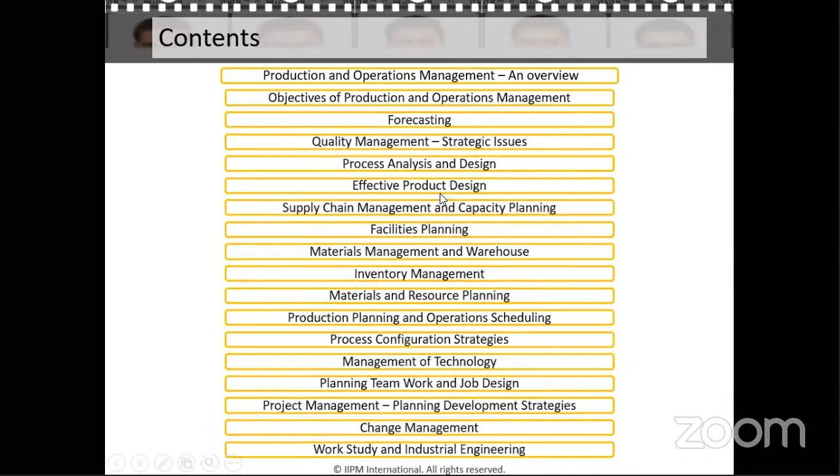Okay, so quickly, let's look at the overview of production and operations management. The very essence of any business is to cater to the needs of customers by providing services and goods, and in the process, create value for customers and solve their problems. Production and operations management talks about applying business organization and management concepts in the creation of goods and services. So in essence, production and operations management is responsible for the transformation of raw materials into value, which comes out in the form of goods or services that customers buy.

Production is a scientific process which involves transformation of raw materials or inputs into desired products or services by adding economic value. Production can broadly be classified into: one, production through separation; two, production through modification; and three, production by assembly. Let's look at what each one is trying to say.

Please note, our assignment as safety officers in this regard is to find out the possible sources of hazards, possible sources of risks to the production and operations department of any organization, and also to find the best safety approaches and best safety strategies we can use in managing operations and production in our organizations.

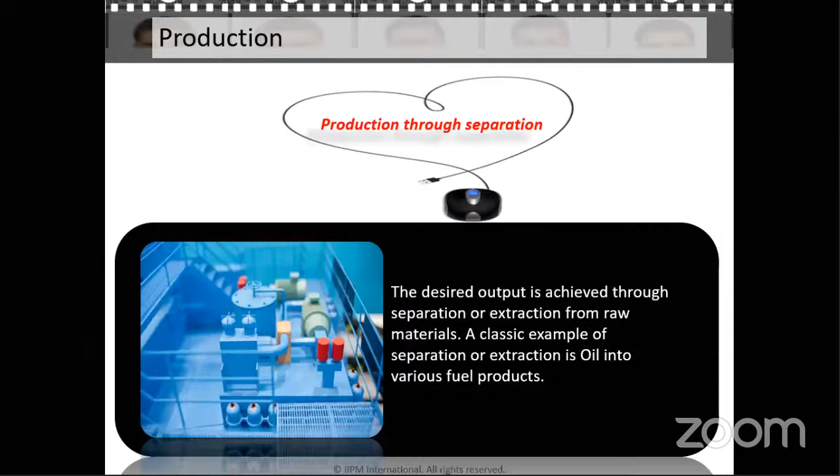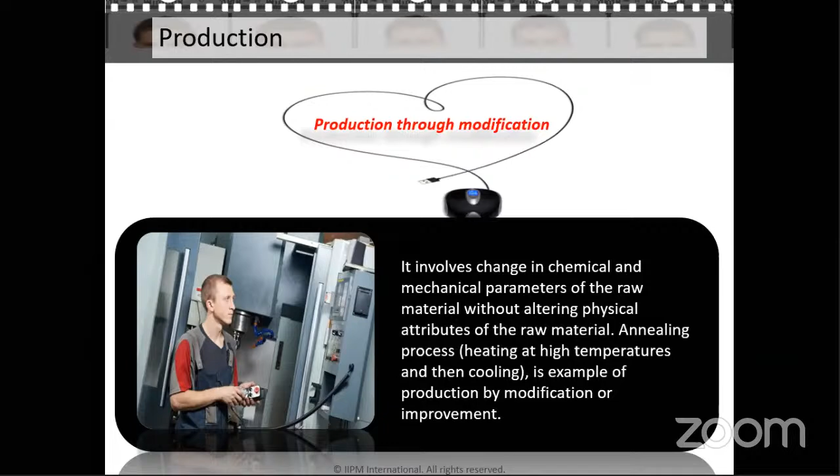So quickly, let's look at each of these production classes: production through separation, production through modification, and production by assembly. Production through separation: the desired output is achieved through separation or extraction from raw materials. A classic example of separation or extraction is refining oil into various fuel products. Then we have production through modification, which involves change in chemical and mechanical parameters of the raw material without altering its physical attributes. The annealing process, heating at high temperatures and then cooling, is an example of production by modification or improvement.

Then we have production through assembly. Car production and computers are examples of production by assembly. We have labor, capital, and raw material all going in as input, then a scientific process, and then we have an output as services or goods. A good example of assembly could be mechanical productions, or most goods that go through mechanical production like cars, computers, motorcycles, and things in that category.

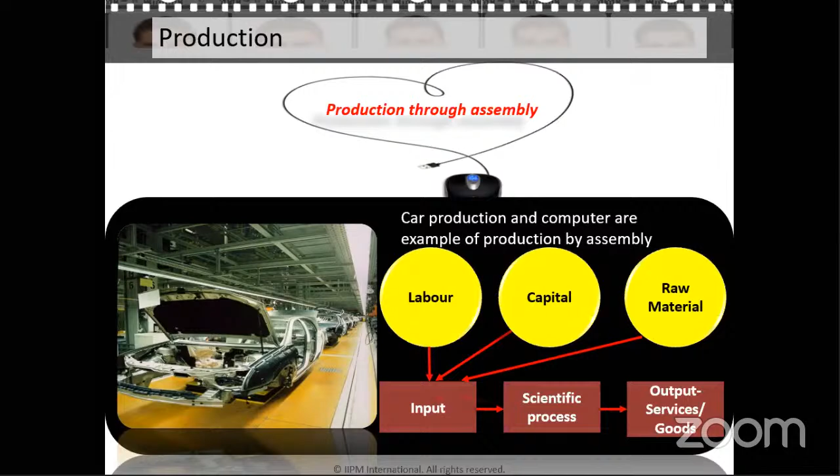Production function and management. Successful organizations have well-defined and efficient line function and support function. Production comes under the category of line function, which directly affects customer experience and thereby the future of the organization itself. The aim of production function is to add value to a product or service, which will create a strong and long-lasting customer relationship or association.

Production function can be achieved by healthy and productive association between marketing and production people. Marketing function people are frontline representatives of the company and provide insights into the real product needs of customers. Effective planning and control on production parameters to achieve or create value for customers is called production management.

Operations management: to deliver value for customers in products and services, it is essential for the company to do the following. One, identify the customer needs and convert that into a specific product or service, perhaps the number of products required for a specific period of time. Two, based on product requirements, do backward working to identify raw material requirements, and then engage internal and external vendors to create a supply chain for raw materials and finished goods between vendor, through production facility, to customers.

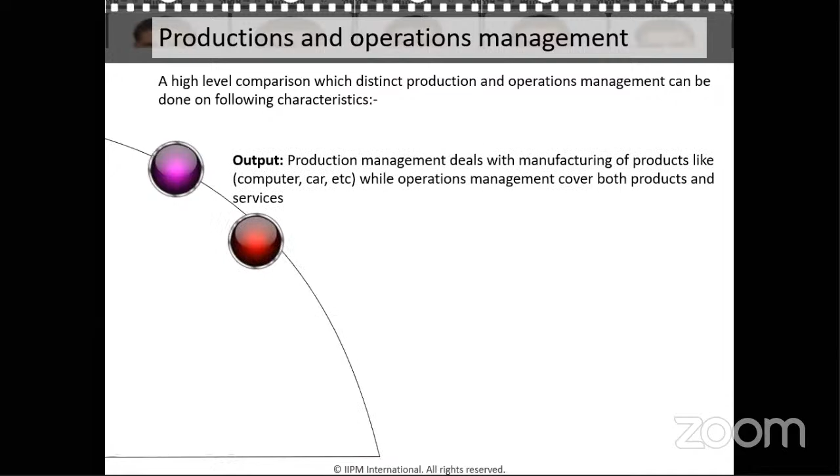Now, production and operations management, a high-level comparison which distinguishes production and operational management can be done on the following characteristics. We have output. Production management deals with manufacturing of products like computer, car, etc., while operations management covers both...

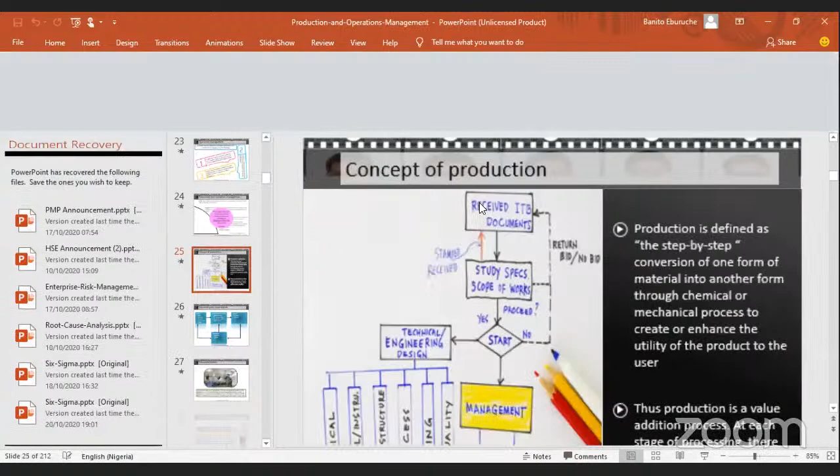Sorry, I'm trying to make sure that this is not covering... Please, I'm still with you, just trying to make sure that the delivery is not affected, so sorry for the break. Okay, so we have output. I don't really know why this is affecting my class. Sorry about this. Okay, so production operations management vary in output. Okay, there is actually something I need to do on this slide because it's affecting my work.

Okay, so I have output. On production, we have customer contact and some other things that are listed there. I'm going to come back to that slide, but for the sake of time, let's just proceed to the concept of production.

On the concept of production, we'll be looking at what production is. Production, in this case, will be defined as the step-by-step conversion of one form of material into another form through chemical or mechanical process, to create or enhance the utility of the product to the user.

Now, by this definition of production, it already gives us a clear indication that all of the things around production comprise hazards and risks which could affect the product at the end of the day, which would affect the satisfaction customers derive from the product, which could also endanger the lives of the people working, and could also affect the reputation of the organization if not managed well. So production processes themselves are sources of hazards and they are also sources of risk.

Thus production is a value addition process. Yes, we don't have any doubts about the fact that production is a value addition process. And for the fact that it's a value addition process, it requires a definite scope, in which each scope content will have some hazard elements which have to be identified and then controlled, and mitigation measures put in place to ensure that the activities carried out during production and operations do not end up becoming hazardous to the work environment.

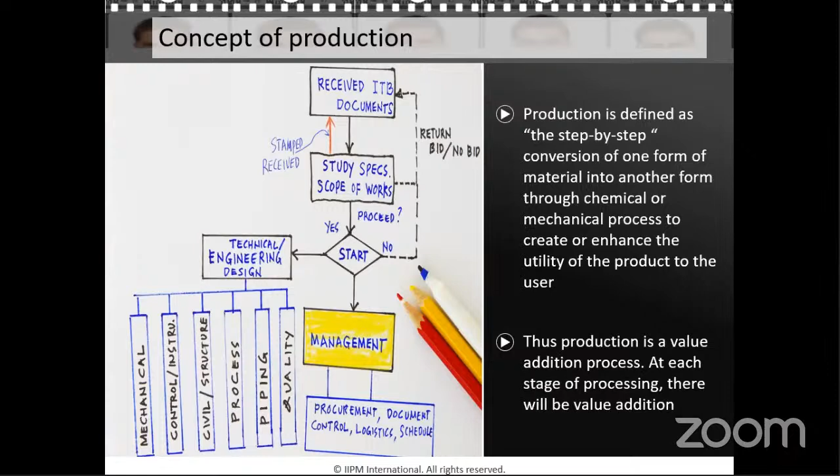And also, we should use job hazard analysis, we should use hazard and effect management processes, and we should use risk management processes to ensure that all of those hazards are well identified and then assessed, and necessary mitigation measures are put in place. All right, so this is what our assignment as safety officers is in the production and operation management processes.

Now, quickly, let's look at the schematic production system. If you look at the inputs, we have man, we have materials, we have machines, we have information, and we have capital. Now, if you look at the inputs, they are the necessary requirements that we need for production. We could also see that each of these inputs has some traits coming handy as hazards on themselves. From man, we can see hazards as unsafe acts and unsafe behaviors that could cause hazards.

And then from materials, we could see poor quality materials that could also affect the quality of the product at the end of the day. And then from machines, we could see faulty machines as being part of the hazards that could affect the whole production line, thereby impairing the value that needed to be created. Then we could also look at information: where there is poor information, it also becomes a hazard to the production process. Then capital: where there is poor or lack of capital, it could also become a source of hazard to the organization.

Then we look at the transformation process. When you look at the product design, if it is not well taken care of, there could be the risk of error coming in, which could affect the whole product line at the end of the day.

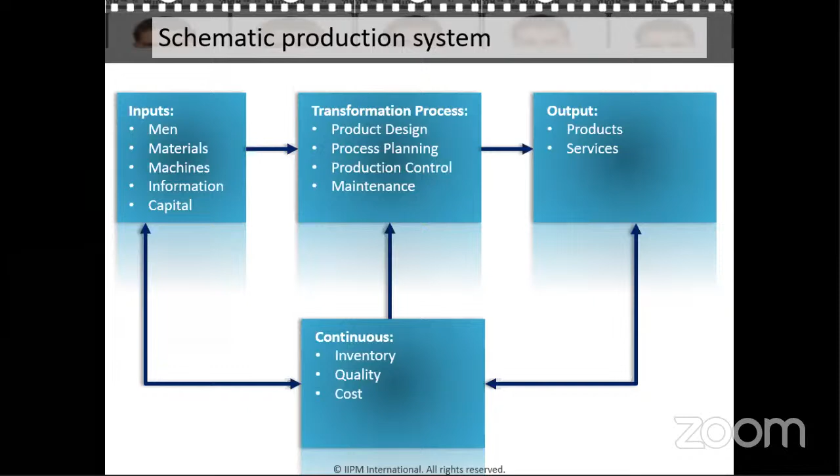Now let's quickly look at the production system. The production system of an organization is that part which produces products of an organization. It is that activity whereby resources flowing within a defined system are combined and transformed in a controlled manner to add value in accordance with the policies communicated by management.

A simplified production system is shown above, that's what we just looked at. So if you look at this definition of what production is all about, it tells you that the whole process, if not controlled, could be hazardous.

The whole process, if not well managed, could be filled with risks. And all of these risks could result to death, could result to injuries, could result to lost time, could result to medical treatment cases and all of that.

So we then have to pay attention to production processes. Now, if you ever hear things like someone having an accident in a workplace, either the person was in the production or operations department, and the person did not just have an accident. There were activities that resulted to the accident, or there were unsafe acts that were committed during certain activities that led to those accidents. So we must therefore pay attention to production and operations management as safety managers.

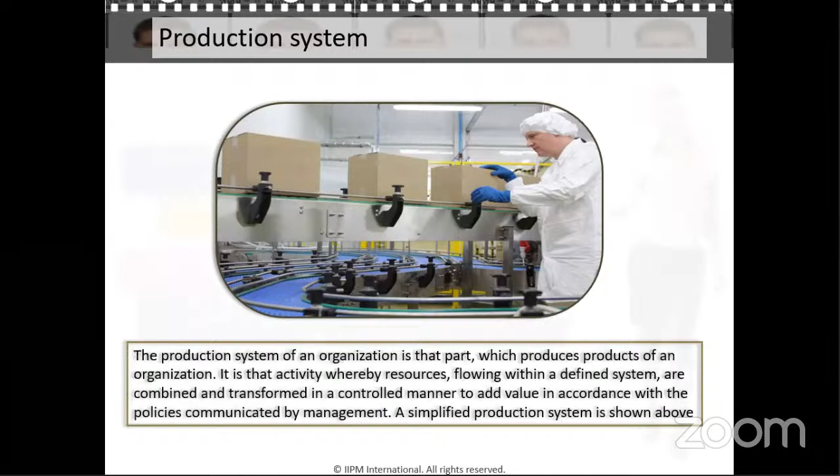Now, what are the characteristics of production system? Production system is an organized activity, so every production system has an objective. The system transforms the various inputs to useful outputs.

It does not operate in isolation from the other organization system. There exists a feedback about the activities which is essential to control and improve system performance.

So our objective or part of our work as safety officers is to ensure that the objectives of the company's production system is met, the goal for which the production system was set. Our assignment is to ensure that those goals are met without injuries.

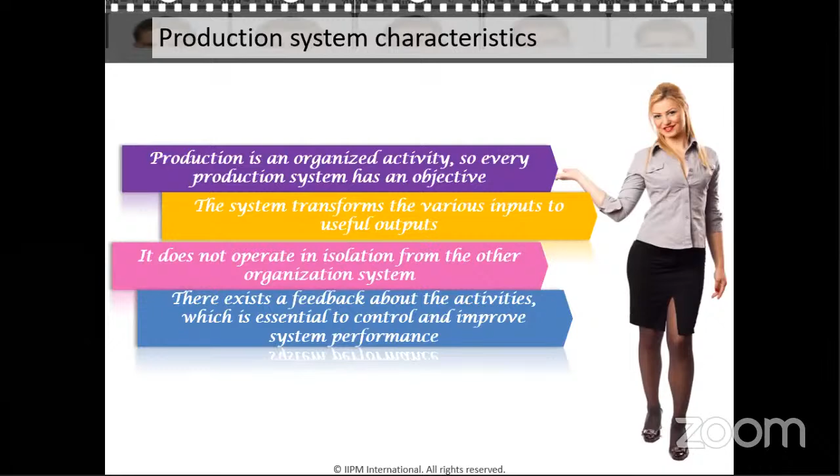Those goals are met without lost time, those goals are met without loss of life, loss of properties, those goals are met without having poor quality products. That's essentially what we want to do as safety officers or safety managers in the production and operations department.

Now, quickly, classification of production system. We have the continuous production, we have the mass production, we have the batch production, we have the job shop production. This is classification based on production operations volume versus output or product variety.

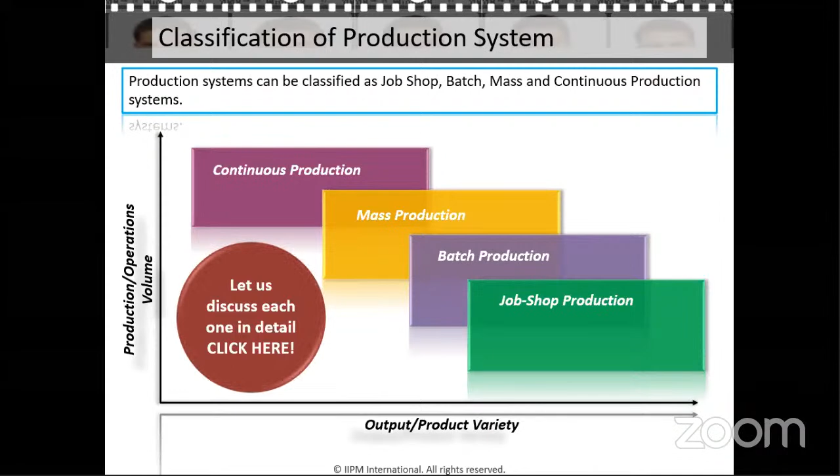So quickly, let's look at each of them. Job shop production is characterized by manufacturing one or few quantity of products designed and produced as per the specification of customers within prefixed time and cost.

So when you begin to look at custom-made products, you could say they are job shop. When you go to a tailor to get him or her to fix or design a cloth for you, that's a job shop approach. When you go to a car dealer or car manufacturer and tell him exactly what kind of car he should produce for you, that's a kind of job shop production. You could do the same thing for your phones, for your laptop. Some people just have that attitude of having custom-made products, irrespective of the cost.

The distinguishing feature of this is low volume and high variety products. A job shop comprises of general purpose machines arranged into different departments. Each job demands unique technological requirements, demands processing on machines in a certain sequence.

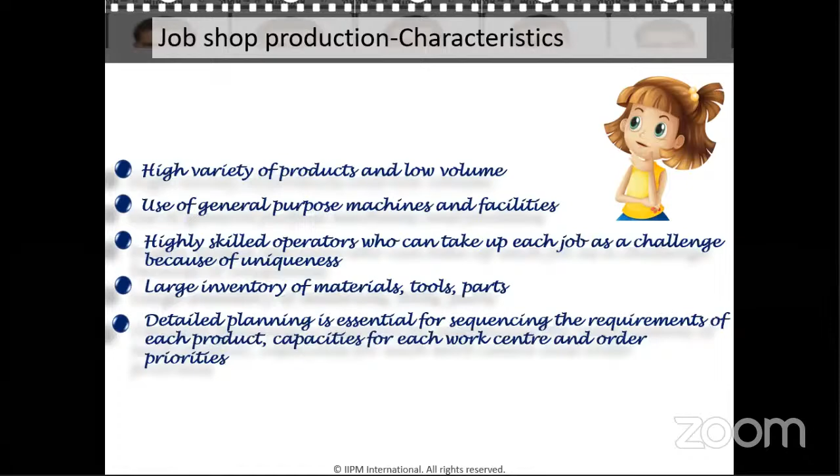Now, quickly, what are the advantages and disadvantages of job shop production? Because of general purpose machines and facilities, a variety of products can be produced.

Operators will become more skilled and competent as each job gives them learning opportunities. Full potential of operators can be utilized. Opportunity exists for creative methods and innovative ideas.

The disadvantages are higher cost due to frequent setup changes, higher level of inventory at all levels and hence higher inventory cost. Production planning is complicated, and larger space requirements are also needed.

Now, batch production is defined by the American Production and Inventory Control Society as a form of manufacturing in which the job passes through the functional departments in lots or batches, and each lot may have a different routing. It is characterized by the manufacture of a limited number of products produced at regular intervals and stocked awaiting sales.

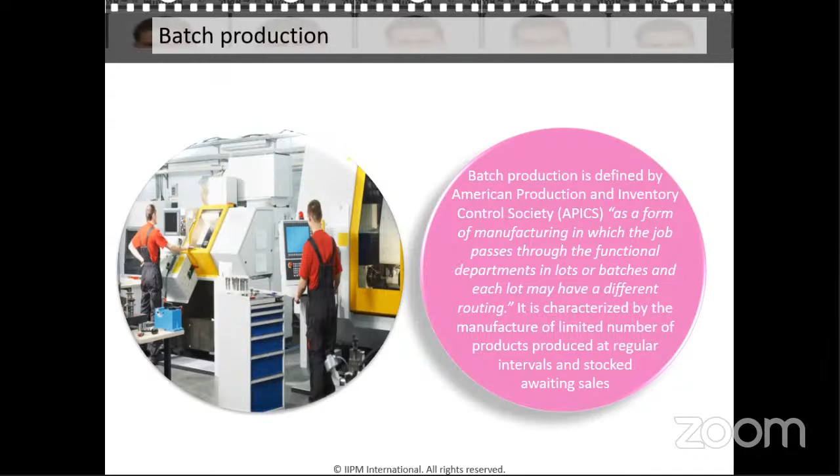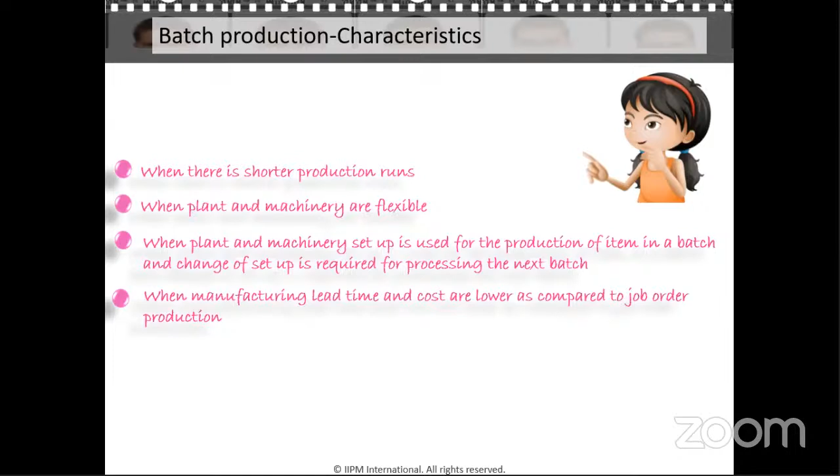The characteristics of batch production are shorter production runs, flexible plant and machinery, and plant and machinery setup used for production of items in a batch, with a change of setup required for processing the next batch. Manufacturing lead time and cost are lower compared to job order production.

What are the advantages and disadvantages? Advantages include better utilization of plant and machinery, promotion of functional specialization, lower cost per unit compared to job order production, lower investment in plant and machinery, flexibility to accommodate and process a number of products, and job satisfaction for operators.

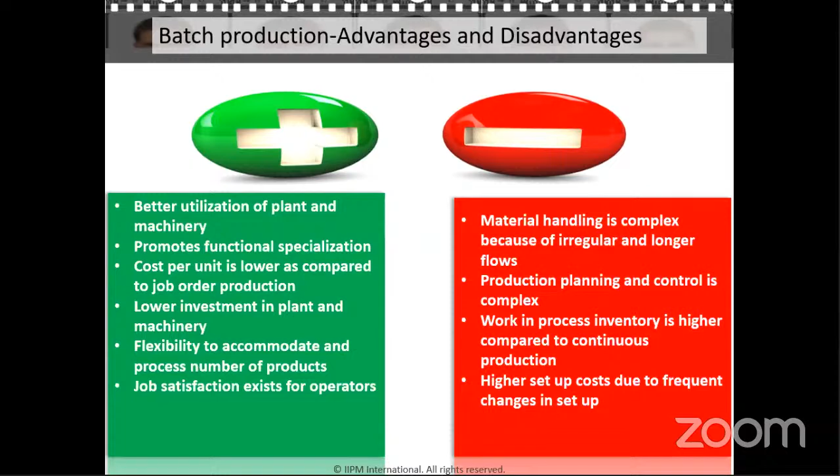The disadvantages: materials handling is complex because of irregular and longer flows. Production planning and control is complex. Work in process inventory is higher compared to continuous production. They will have higher setup costs due to frequent changes in setup.

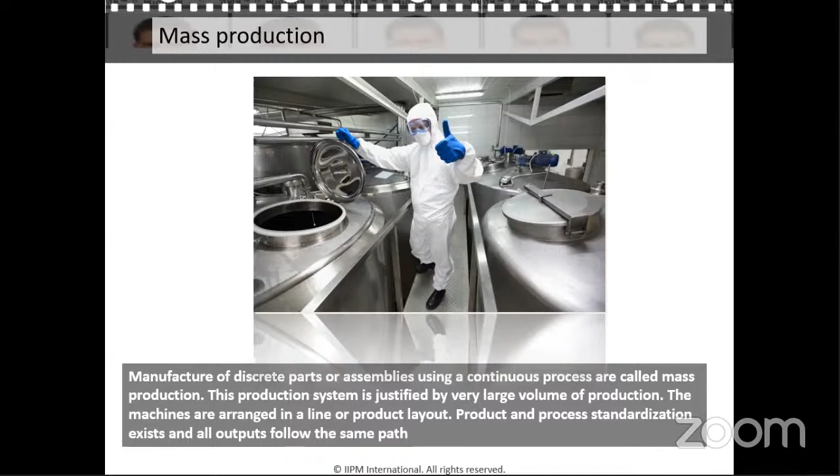Then we have mass production. Manufacture of discrete parts or assembly using a continuous process is called mass production. This production system is justified by a very large volume of production. The machines are arranged in a line or product layout. Product and process standardization exists and all outputs follow the same path.

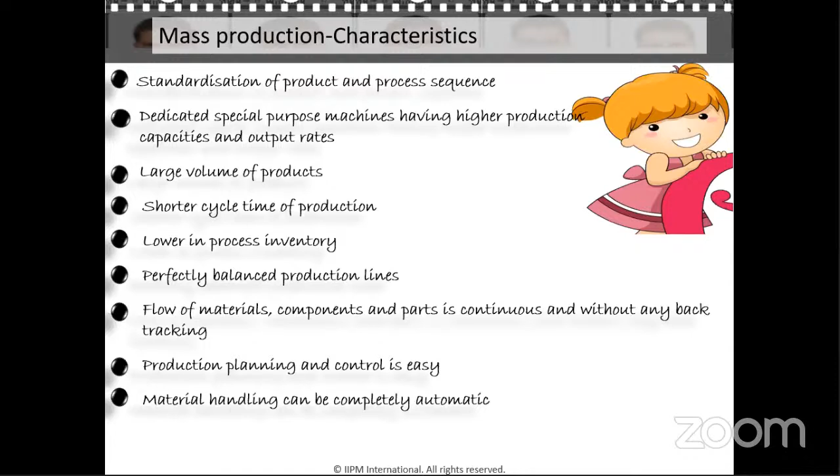The characteristics are standardization of products and process sequence, dedicated special purpose machines having higher production capacities and output rate, large volume of products, shorter cycle time of production, lower in-process inventory, perfectly balanced production lines, and continuous flow of materials, components and parts without any back tracking. Production planning and control is easy, and material handling can be completely automatic.

For advantages, we have higher rate of production with reduced cycle time, higher capacity utilization due to line balancing, less skilled operators are required, low process inventory, and manufacturing cost per unit is low.

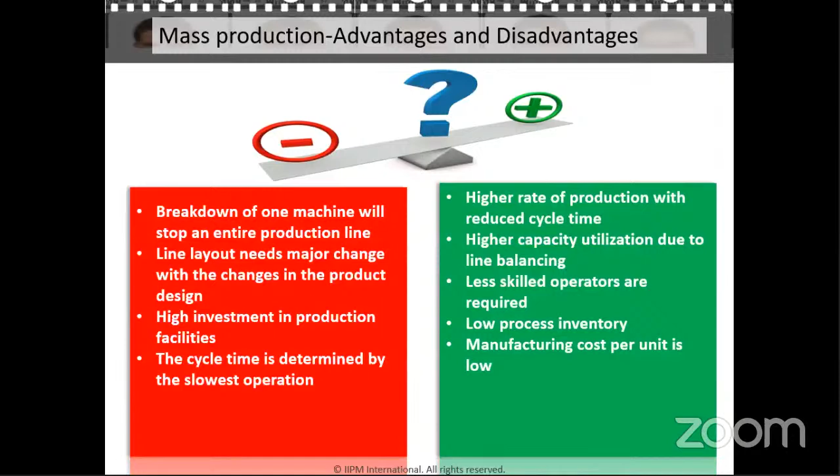For disadvantages, breakdown of one machine will stop an entire production line. Line layout needs major changes with changes in the product design, and there is high investment in production facilities. The cycle time is determined by the slowest operation.

Then we have the last one, which is continuous operation, with continuous control and continuous improvement methods. Production facilities are arranged as per the sequence of operations, from the first operation to the finished product. The items are made to flow through the sequence of operations through material handling devices such as conveyors, transfer devices, and so on.

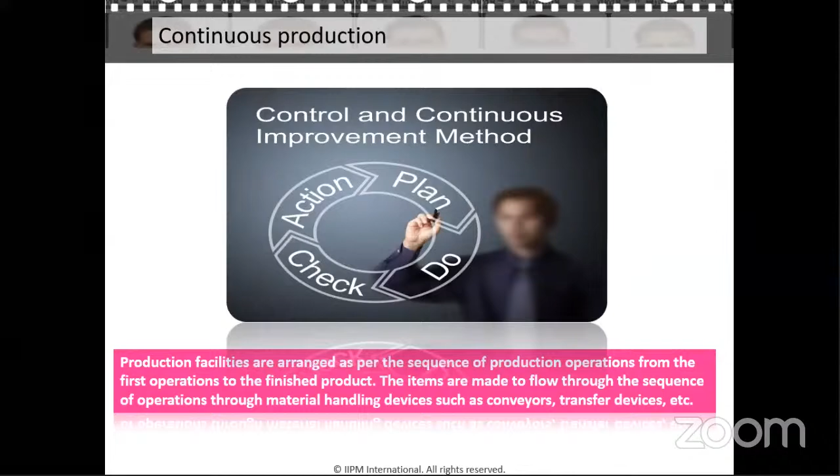Characteristics of continuous production: dedicated plant equipment with zero flexibility. Material handling is fully automated. The process follows a predetermined sequence of operations. Component materials cannot be readily identified with the final product. Planning and scheduling is a routine action.

Advantages: standardization of product and process sequence, higher rate of production with reduced cycle time, higher capacity utilization due to line balancing. Manpower is not required for material handling as it is completely automatic. Persons with limited skills can be used on the production line. Unit cost is lower due to high volume of production.

For the disadvantages, flexibility to accommodate and process a number of products does not exist. There is very high investment for setting up flow lines. Product differentiation is limited.